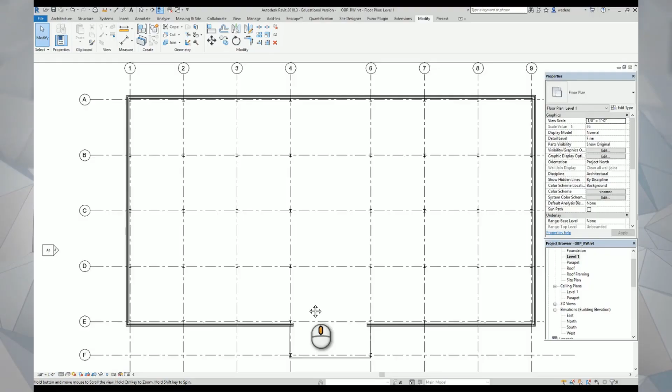So now I am ready to start doing the infill portions. Before I do that, the next thing I need to do is I need to create a wall to enclose my columns. You do not have to enclose your columns. If you want to leave your columns exposed, you can do that, but you will need to paint them when we get ready to do finishes. But for those of you who want to actually enclose your columns, this is what you're going to need to

do. I'm going to go to Wall, Architectural, and we want to start with a regular interior wall that's already in here. And in this case, the basic wall that we're going to use is a 4 7/8 inch partition, but it will not be 1 hour rated. So that's the very first thing I'm going to do.

I'm going to go in and I'm going to edit this wall, and I'm going to duplicate it, and I'm going to take off the 1 hour part, because typically that width for a 1 hour wall is going to be a different type of gypsum board. But the way that the Revit package is set up, this is just a regular 5/8 inch, so we don't need to do that. We just need to do that in the name. So I'm going to say OK and say OK. So now I have my basic interior wall that is not rated.

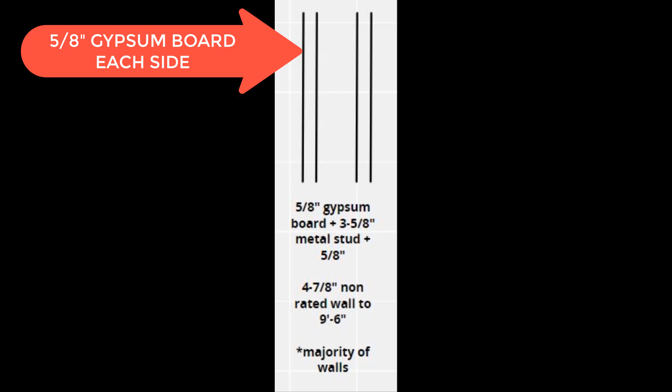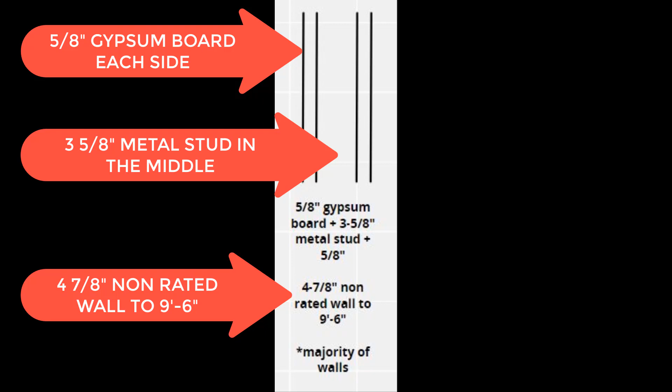Just to go back over this, this is our typical wall that will be used throughout most of the project. You will have a layer of 5/8 inch gypsum board on each side, plus a 3 5/8 inch metal stud. It should be labeled as a 4 7/8 inch wall, and it will go up to 9 foot 6 inches above the floor. So make sure you have it set properly.

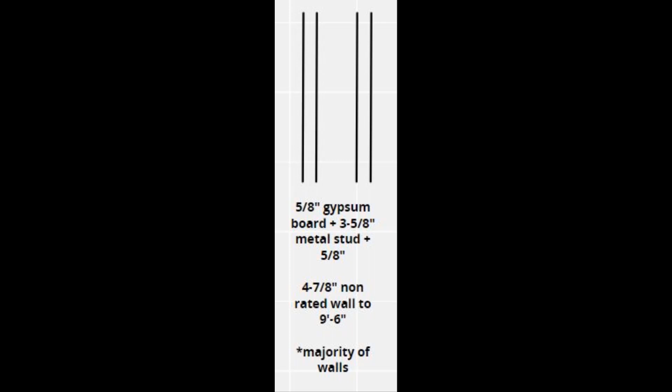From that, I'm going to create my wall that I want to put around my columns, my column wrap. I want to start with the wall that I just created, and I'm going to modify it. I am going to start by duplicating it and renaming it. So again, I'm going to go into Edit Type, and this time I'm going to duplicate it, and I'm going to call this 4 1/4, because we are going to take off one layer of the gypsum board.

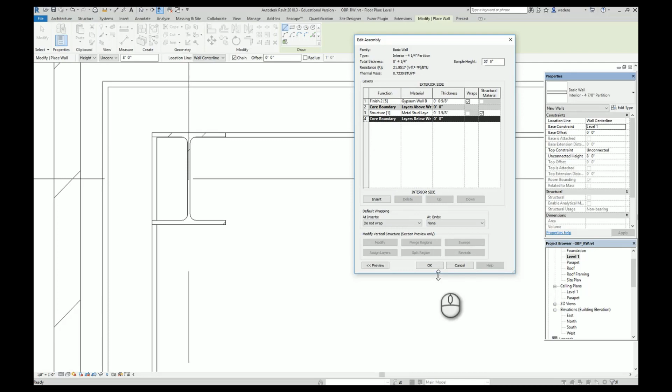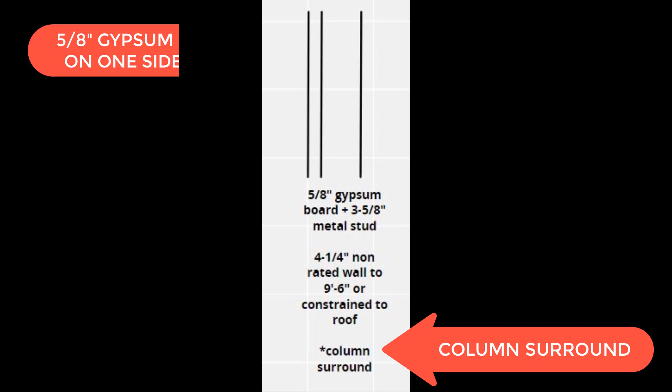So I'm going to say OK, and I'm going to go into Edit, and I'm going to take out the interior piece of the gypsum board. If I click on that and hit Delete, you'll see now my wall is 4 1/4, and I'm going to say OK. So let's review this wall type again before we move on. This is going to be the wall type around your columns. It will only have one layer of 5/8 inch gypsum board because the stud fits up against the column. That will make it a 4 1/4 inch non-rated wall.

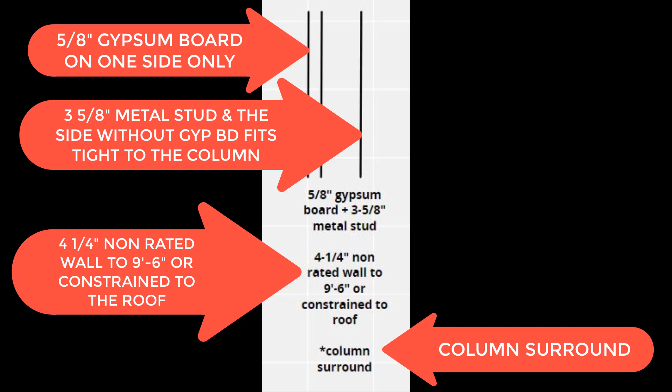You have the choice of either setting these to go up to 9 foot 6 or being constrained to the roof. Again, it would probably be easiest to go ahead and constrain them to the roof. That way you don't have to do that column surround on each floor. But I do caution you, when we get ready to copy our floors to the second floor and the third floor, you'll want to make sure you don't copy these on top of each other if you take them up to the roof. If you only take them up to 9 foot 6, then you can go ahead and just select them when we get ready to copy up to the next level. So it's your choice which way you prefer to do it.

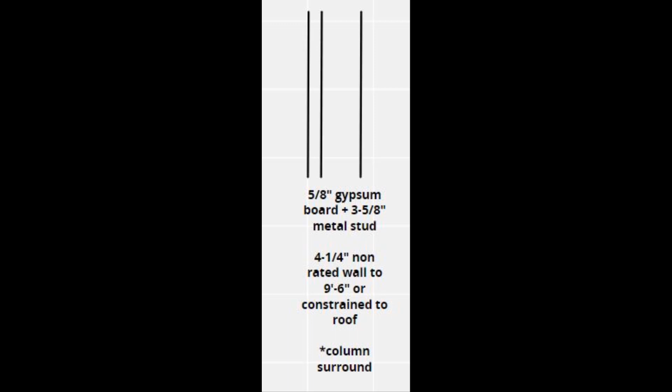So let's do our column surround. I want to pick my wall, and I want to pick the core face interior. Before I start drawing my wall, I want to set my height. All of our interior walls are going to be unconnected, and they need to be at 9 foot 6. We are going to have a ceiling height at 9 feet.

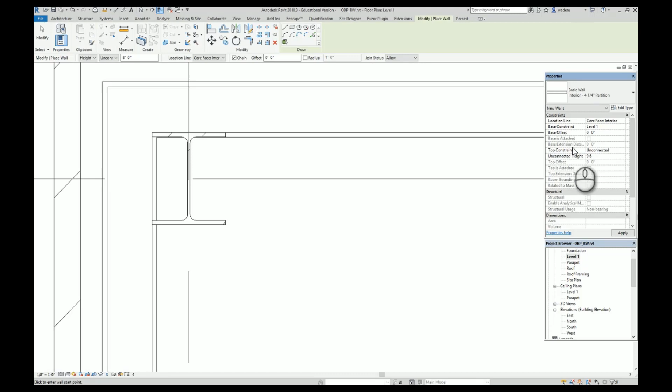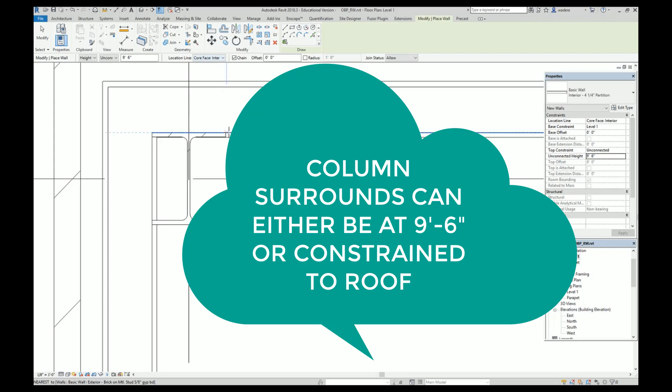So we want all of our walls to go up about 6 inches higher, so we have something for the walls to die into. We don't want to take them up higher unless they are a rated wall, because it makes it too difficult to get ductwork, etc. over the top of the wall. Again, the column surrounds are an exception to this. If you do want to go ahead and take them up to the roof, you can. It's your choice. So I'm going to hit Apply. Then again, I want to make sure I have core face interior, and I'm going to start drawing my wall and enclosing it.

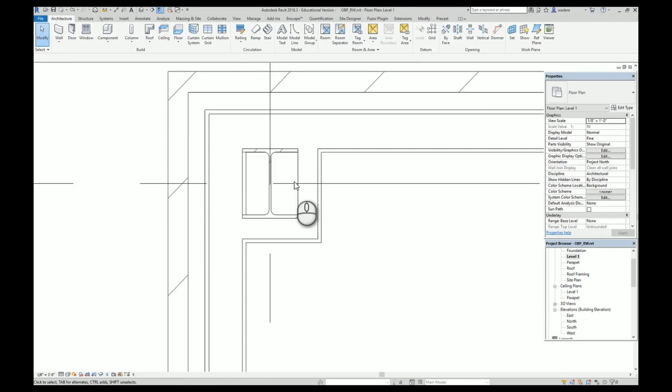So you can see now I do not have gypsum board on the inside, and I do on the outside. So if we go and look at this in our 3D view, you can see I have my enclosure around my column. So I need to do that at every single column. So I'm going to come over here, and I'm going to do the same thing here.

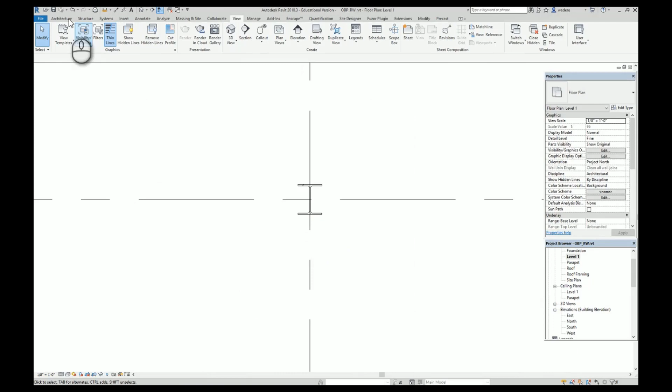To where I have all of my columns enclosed. I'm going to do that everywhere except for right through here. This wall here is going to be a separation wall between the two office areas. Yours may not be a complete rectangle, however it goes. This needs to be a 6-inch, 1 hour rated wall.

In reality, code is not going to require that because our building is only 3 stories high and it has a sprinkler system. But just for practicing, I want you to practice creating and placing a 1 hour rated 6-inch metal stud wall. For this area here, we are going to create a new wall type.

I'm going to start with my 4 7/8 partition 1 hour, and I'm going to do edit type, and I'm going to duplicate, and I'm going to change this to 7 1/4 inch partition 1 hour, and I'm going to say OK, and then I'm going to go in and edit the structure.

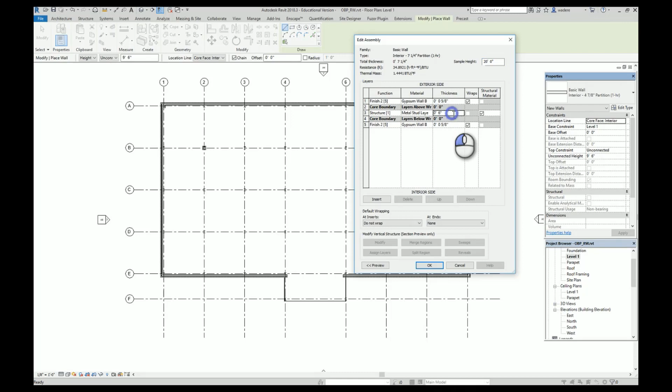Again, if this was a true 1 hour wall, this would be a 5/8 inch type X gypsum board, which is a fire rated gypsum board, but in here it only just lists it as the gypsum board 5/8 inch. So what we do want to change here is the stud size. It needs to be a 6-inch stud. So now you'll see it's 7 1/4 inches, and I'm going to say OK, and I'm going to say OK.

Now this wall, again, is going to be unconnected, and in reality it would come up to the bottom of the deck. Our floor-to-floor height is going to be 14 feet. So I'm going to set the height of this at 13 feet 11 inches, just so that it does not penetrate the floor slab above, so we don't see that when we're looking at our floors. And I'm going to say apply.

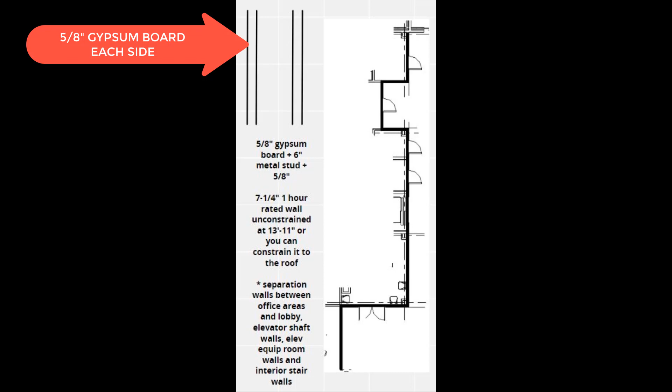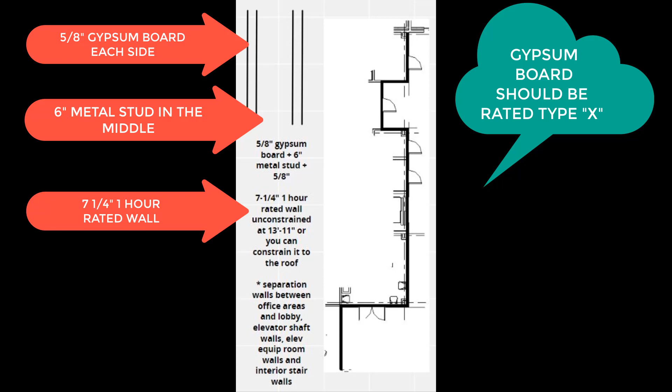Let's review this wall type. It has 5/8 inch gypsum board on each side with a 6-inch metal stud. If you recall, I said that the gypsum board should be a rated gypsum board, even though our program is not set up to show it that way. But you need to know that. That gives us a wall that is 7 1/4 inches, and it needs to say 1 hour rated wall in the description of the wall.

As I did on mine, you do it at unconstrained at 13 feet 11 inches, or you can go ahead and constrain it to the roof, because again, the way that we are setting up ours is not true to the way it would actually be constructed. This needs to be used in the separation between the office areas and the lobby, your elevator shaft walls, your elevator equipment room walls, and your interior stair walls.

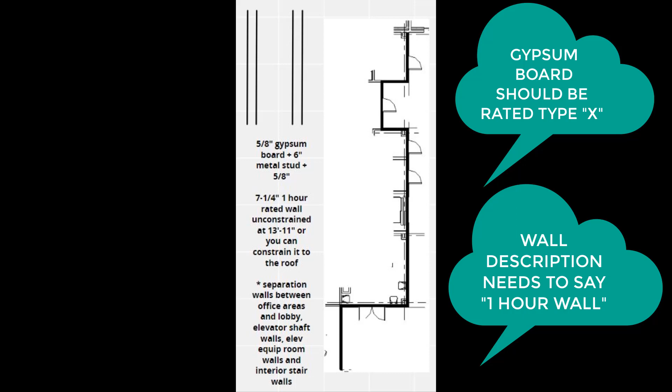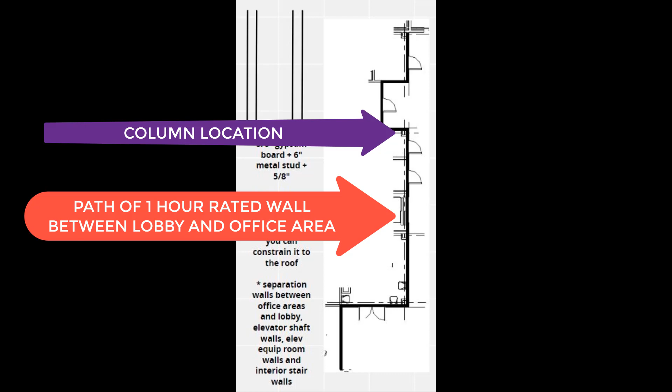If you notice the little diagram on the right, whatever pathway your lobby area takes, your 1 hour wall needs to do that. So if you look, say, where a column is at, you'll notice that the outside of the column that's facing the lobby has to be the 1 hour wall. In reality, you would need to change that wall at the column locations to take the gypsum board off of the inside of the column, but I'm not going to make you do that in these locations.

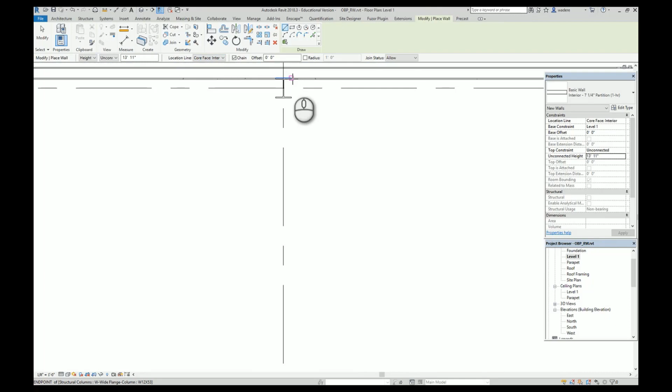Now I'm ready to start drawing my separation wall between my lobby and my office areas. I want my column enclosures to be inside my spaces. This will help make my lobby a cleaner space, and any offsets, etc. around the columns will be inside my office areas and not in the lobby. So I'm going to come out here to the side, and I'm going to draw this wall all the way down. And then I'm going to do the same thing here.

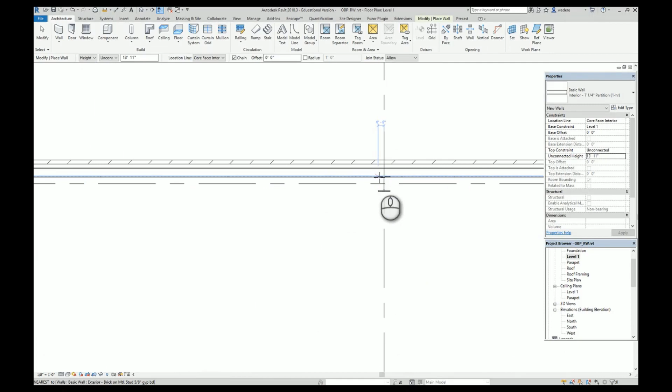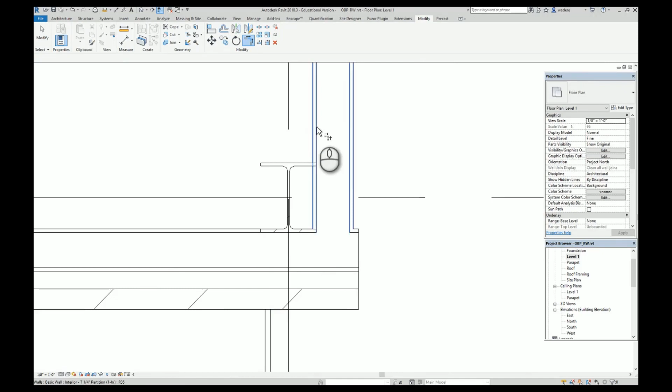And I'll come back and figure out how I want to place that wall exactly. So now if I come over here and look, this one is actually placed exactly how I want it. I want the edge of the column to be against the stud here. So I'm going to use my trim tool, and I'm going to join these two walls to where I have a nice even finish there.

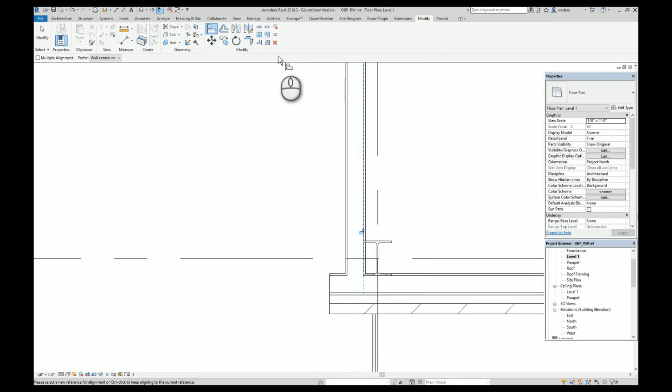And then this one I do need to move, so I'm going to align, and I want to keep my column where it's at. And I want to do align and hit the tab key to there. And then again, I'll use my fillet to make that a nice even finish. So now, because I put my 6-inch wall out here, I don't have to do a 6-inch enclosure around my column. So that made it a little bit more simple.

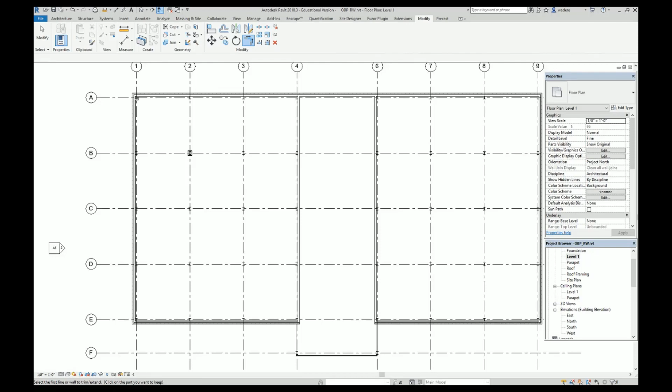Once I get the exterior walls kind of where I want them, I am going to start doing all of the interior. I would start in your core area because this core may have to be adjusted based on what you're doing with your layout. My typical wall inside is going to be the 4 7/8 partition, and it needs to be at 9 foot 6 inches high.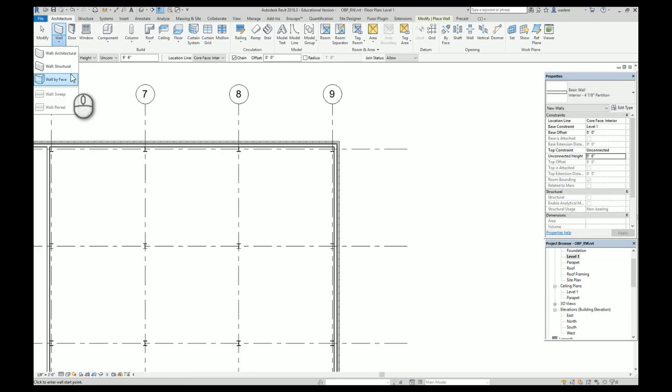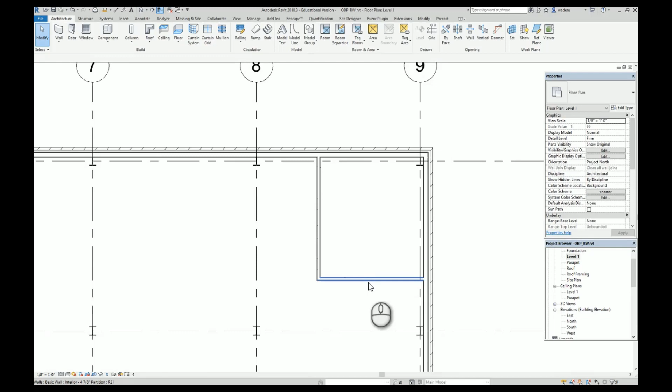So any wall, say if I'm doing my office here on this side, that's what I want it to be. If I click on this, you can see it is a 4 7/8 partition and it is 9 foot 6 inches tall. I also need to worry about the room sizes. So again, like this office is supposed to be around 100 square feet.

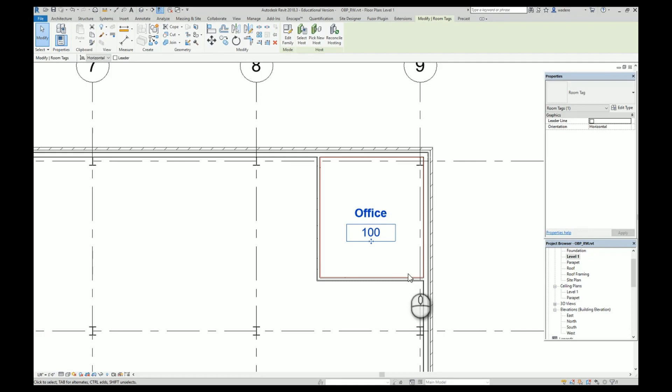So if I go to my room tag and I place that in here, you'll see it gives me the room, and I can change the name of it to say office. And again, you want all of your room numbers on this level to be 100 numbers, so like 100, 101, 102. And then we need to see the square footage. So if I click on this and I go to edit type, you'll see it says show area if I put a check mark in that.

I know this office is too big. I need to make this smaller, and I know really it needs to be about 10 by 10. If I click on this little blue node, it's going to take me to the inside. Click on this one, it will take me to the inside, and I can change that to be 10 feet. Notice this is the wall I have selected, so that is the wall that will move when I hit enter.

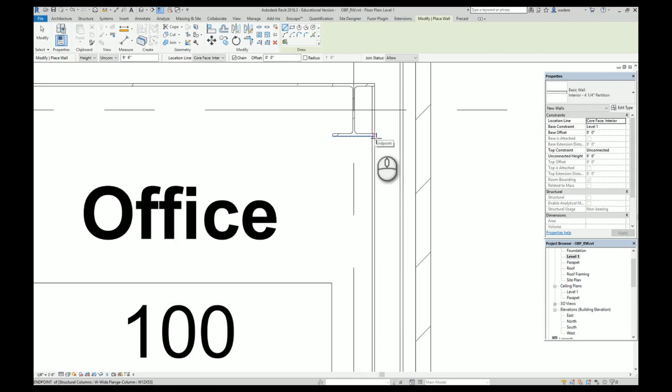And then on this wall, I can do the same thing. I want to go inside because I need these to be inside dimensions. And again, I can change that to 10 feet. And now I'm at my 100 square feet. Of course, I am going to lose a little space because of my column. So I need to come in and add my column wrap. And again, I want to make sure I have that at the right height, which I do.

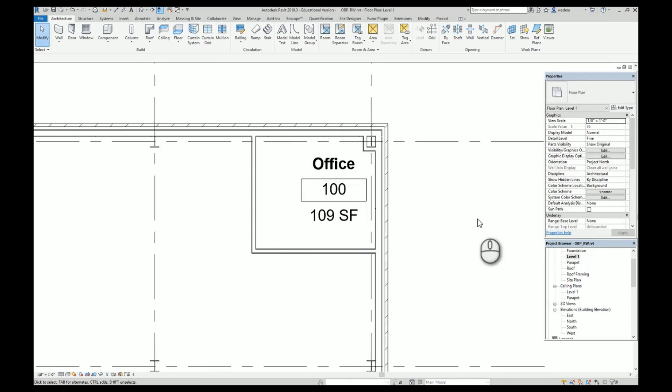So now you can see it's a little bit smaller, so maybe I want to move this out, say, a foot. Now I'm at 109 square feet. That's okay. You are allowed to go 10% above or below what the document required in the initial layouts. So they don't have to be exact, but they do need to be within 10%.

Also, as we're talking about this, my entire office building needs to be within 10% of what the requirement was. Your requirement was 12,000 square foot per floor with a total of 36,000. So let's take a look at how to figure out if you are close, because you don't want to get all of this done and then realize you're 20,000 square feet over or something unreal like that.

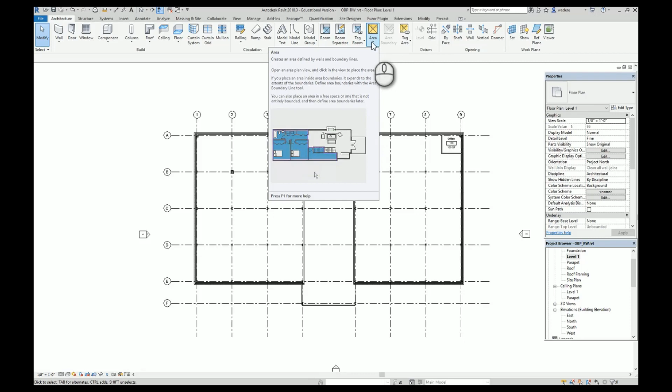So once you get the perimeter walls laid out, before you start filling the infill in, if you go to area plan up here under the architecture tab and you pick level 1 and say okay, and it says do you want to go with the exterior walls, and we do, we're going to say yes. It's going to take us to another plan.

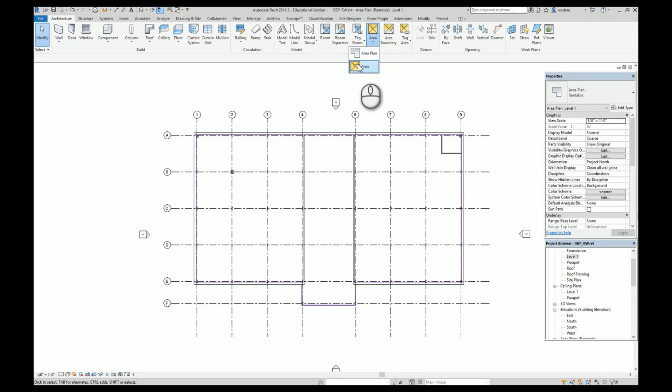So now I can do area and I can bring this in, and it says that I'm at 12,578 square feet. Again, the area plan is its own plan. If you look over here in your project browser, you will see area plans, level 1.

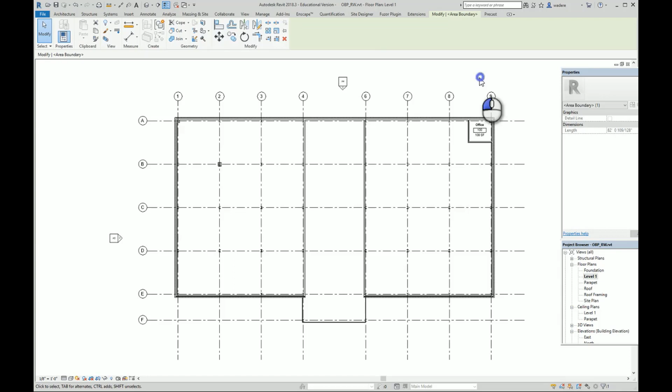So as I go into my level 1 plan and I make changes, if I go to my level 1 area plan, you'll see that made the change with it, so it continually updates. So that is a good way to keep track as you make changes.

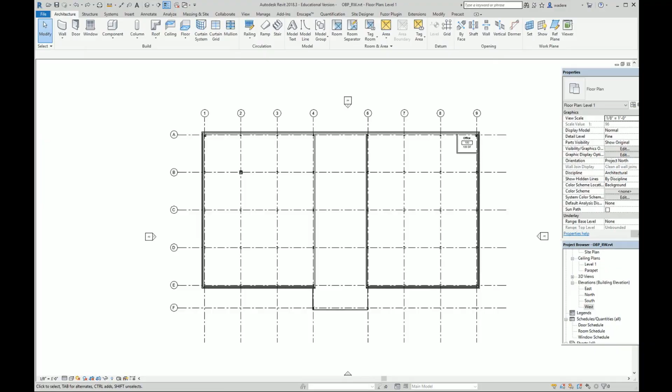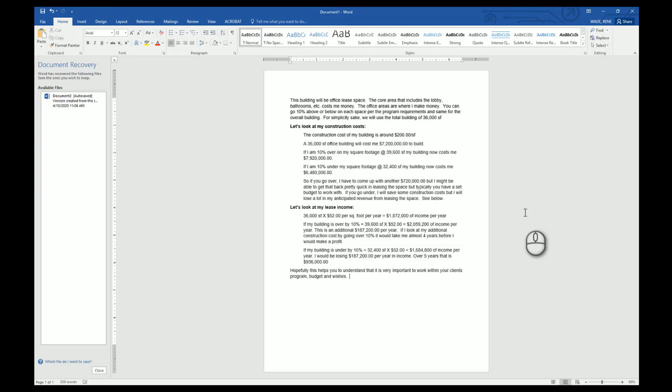So let's talk about area for a little bit. It's extremely important, as I mentioned, that you keep your building within these 10%, either above or below the building requirement. Again, this building is going to be used for me to lease out space to businesses. That's how I'm going to make my money. The core area that includes the lobby, the bathrooms, the elevators, etc., that area costs me money. So we want to minimize that area as much as possible. The office areas are where I will be making my money.

As I mentioned, you can go 10% above or below on each space per the program requirements, and the same for the overall building. Again, not all of the 36,000 square feet will be leasable space because of the core areas, but for simplicity's sake, I'm going to base these calculations off of the 36,000 square feet. So let's look at my construction costs. The cost to build a building similar to this is around $200 a square foot.

So if my building is 36,000 square feet, my building is going to cost me $7,200,000 to build. If I am 10% over on my square footage, which is approximately 39,600 square feet, my building now is going to cost me $7,920,000, which is an increase of $720,000. I may not have that in my budget to be able to do that. I may have that in my budget to be able to do that, but I would need to look to see how long it's going to take me to recoup that amount of money, and is it worth it to do that.

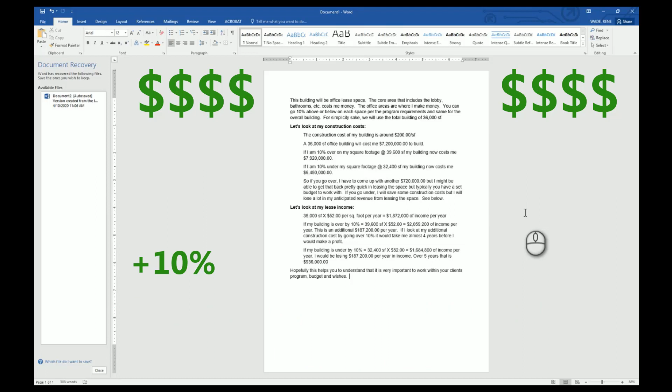If I have 36,000 square feet that I can lease out at $52 per square foot per year, that makes my income $1,872,000. If my building is over by 10%, then I will have an income of $2,059,200 of income per year. This is an additional $187,200 per year. If I look at my additional construction costs by going over 10%, it would take me almost 4 years before I would start to make a profit on my building. So that is the downfall of going too much over.

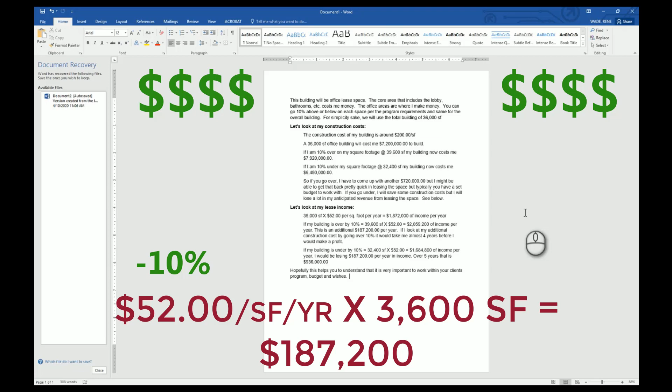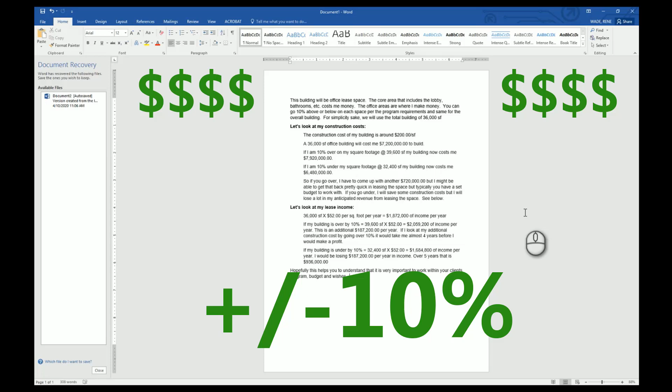If my building is under 10%, this is where I'm really going to lose a lot. I would be losing $187,200 per year in income. Over 5 years, that is almost $1 million. Hopefully this helps you understand that it's very important to work within your client's program, budget, and wishes. So therefore, I am going to require that you stay within 10% one way or the other of the overall square footage. This is going to conclude this part of the video on inputting your interior walls.

The next video, we will continue on with the remainder of the assignment, where we will discuss the stairs, elevator, restrooms, doors, windows, room tags.